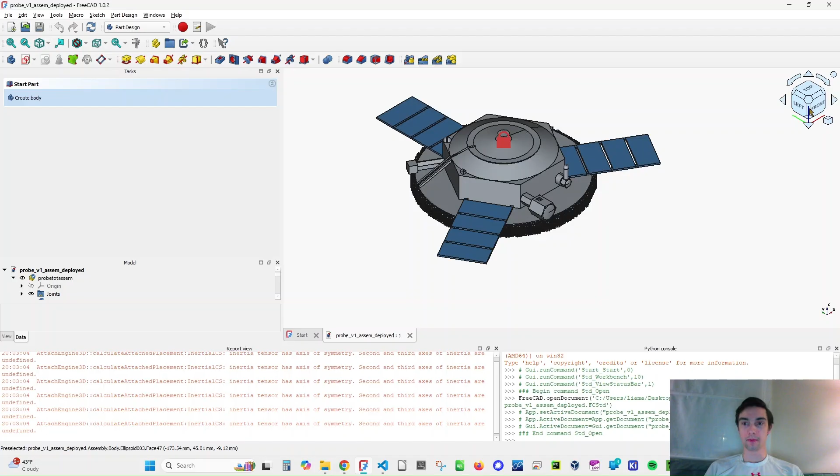So as promised, we're going to start looking at our CADs. I feel like the most important thing is the probe itself. So let's look at the probe in its deployed state. And so we have CAD here. Yes, this is how I'm going to orient the probe during this video.

Don't mind these. Don't worry about this.

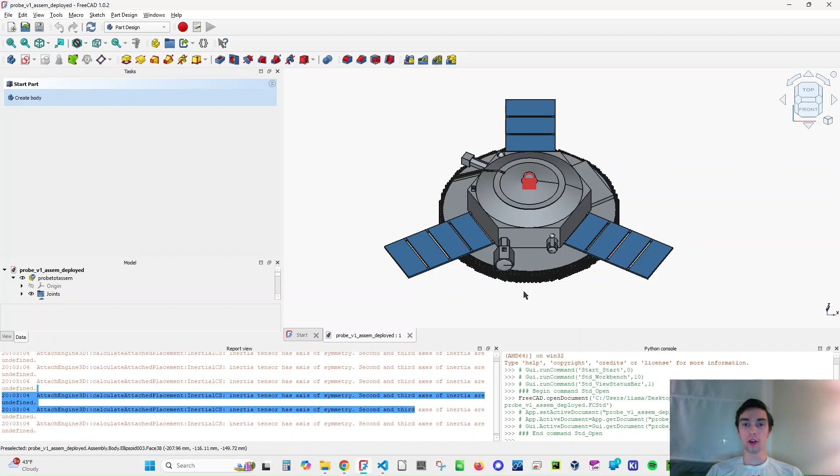So again, this is a pretty small probe. If we look down topside, this has a diameter of, I believe, 850 millimeters. So we're looking at about 1.3 meters in total diameter, including the extended panels.

So the actual probe body itself, can I zoom in? Hello?

One of the big issues with this model is, of course, I've got our beautiful crush zone. And one problem with our crush zone is there's so many hexagons that it has to draw a lot, is what I'm saying.

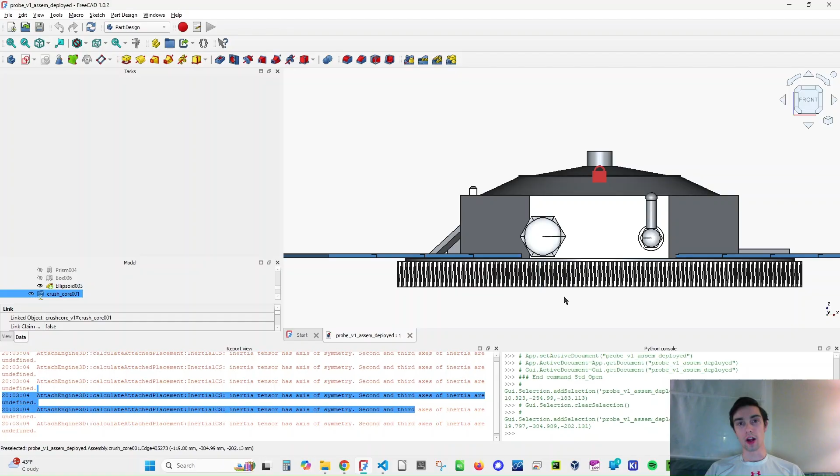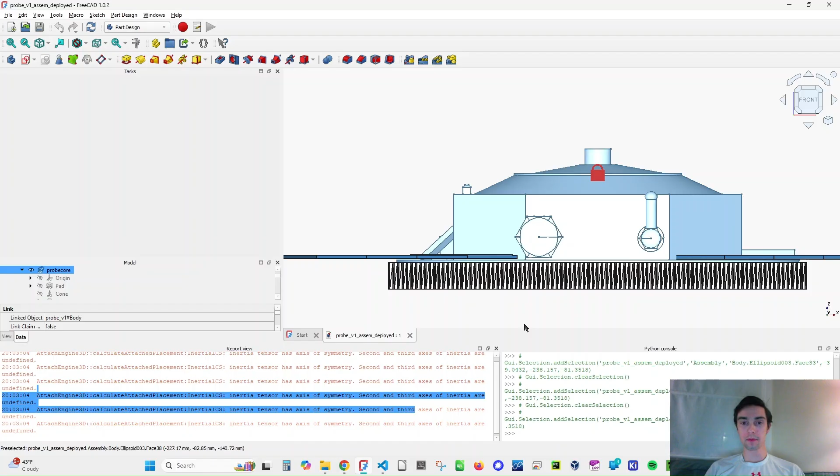So we've got this hexagon here, which is our primary bus. This is where the electronics is, the heater, and of course the battery, the MPPT, maximum power point tracking power converter system that we'll use. And it also holds the radio transmitters and receivers.

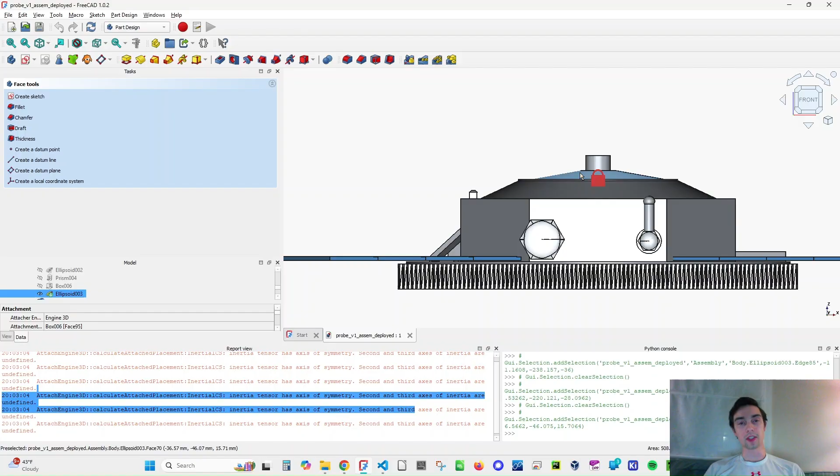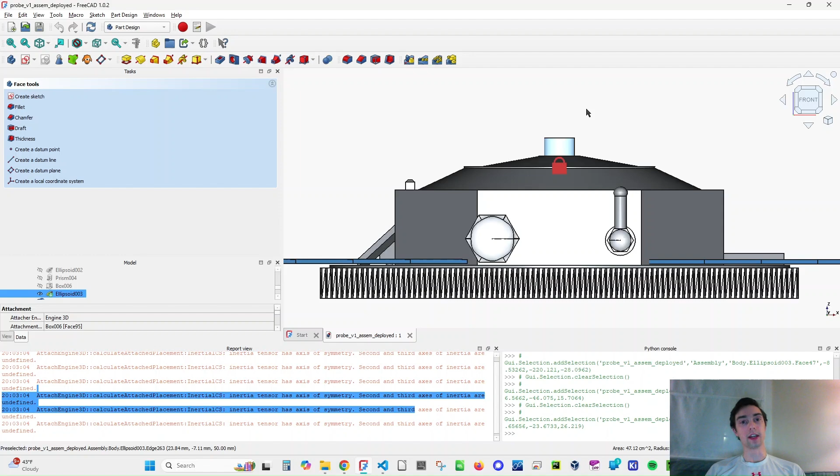We have dual transceivers on the probe, as mentioned before, and our antennas are actually in these top sections. This block here is also where there's a helical antenna, but it's actually primarily just a mechanical protectorant of the rest of the probe during launch of the probes and entry into Mars. So yeah, these are basically where our antennas are stored.

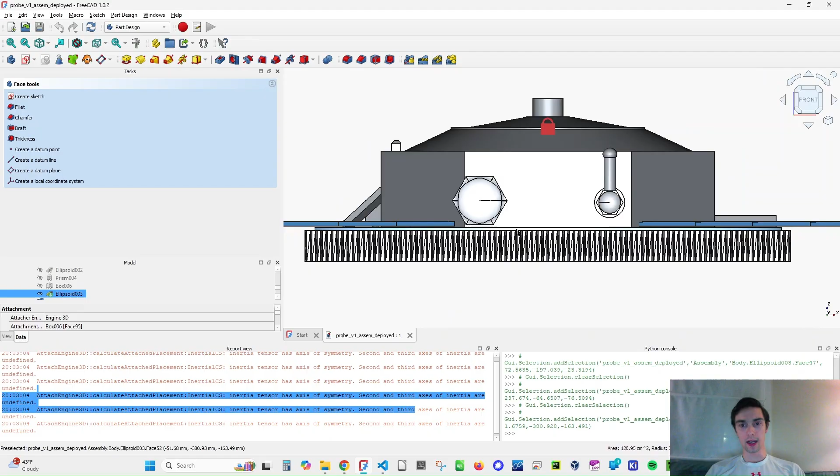This is our main bus that is insulated with our cork and then MLI insulation. And then we've got just a thin aluminum panel here. It is just 5 millimeters, and it is mainly to spread out the force impact from the crush zone, which is all here. I don't remember the exact specs, admittedly. That's in a past video, but as you can see here, it's pretty dang thin.

So I guess I can't see. Will it let me? No, it will not play. Nice. Cool. Okay. But that's not the point.

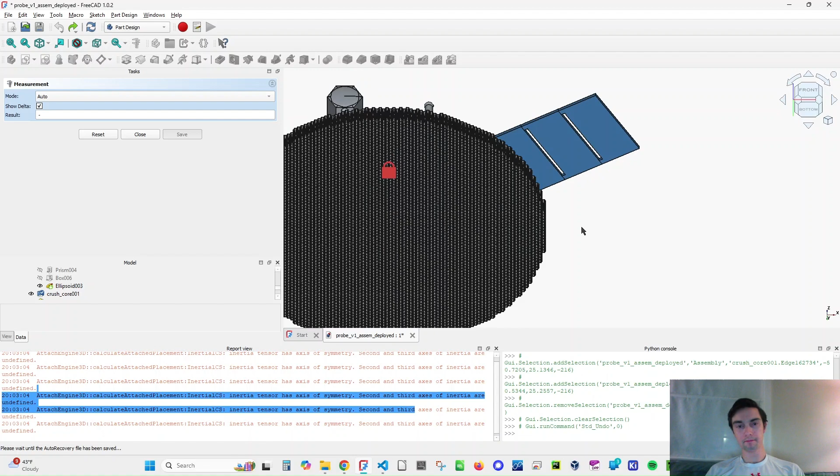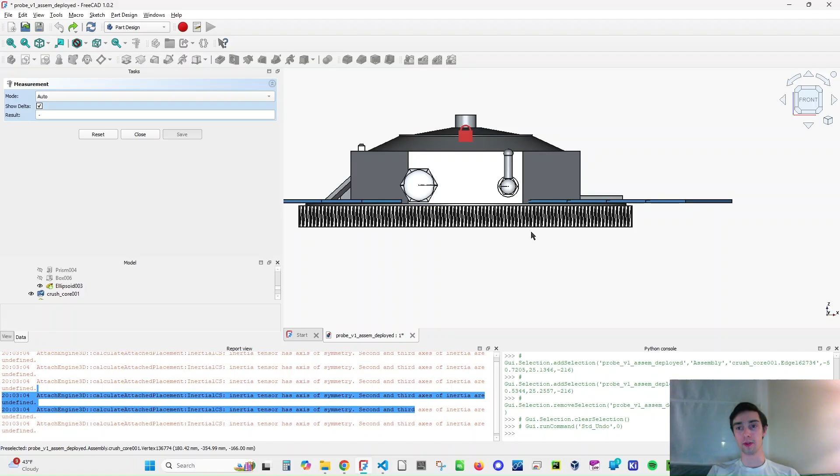So that's our crush zone. It will not be able to absorb all of the energy of the impact, but the probe itself is designed for 300G with full operation status. And that's with a safety factor of 1.2. And that's what our panels are expected to hit maximum before they are unable to deploy.

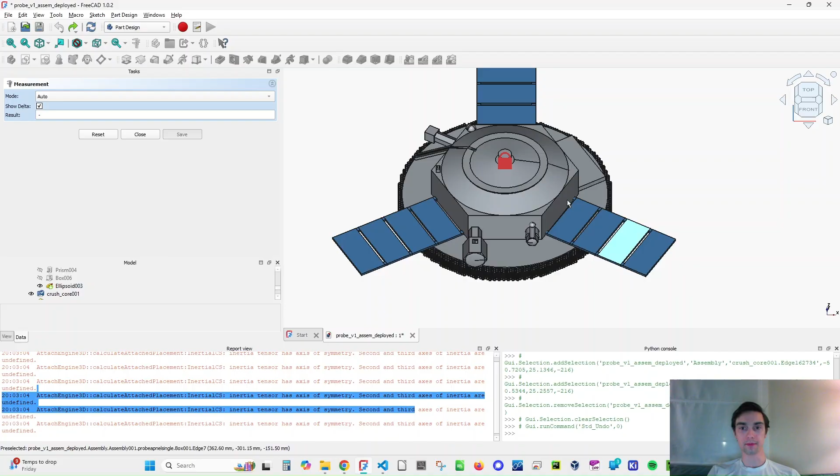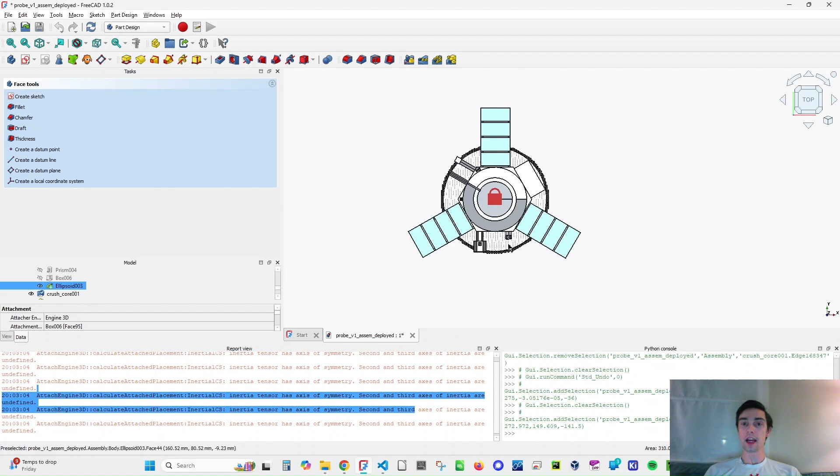And then they're folded up where this last panel here on each side will be facing out and up at a 45 degree angle. What's colored wrong in this model is, okay, I don't need to measure, this is actually an additional panel right here. Of course, it is blocked by the actual probe bus, but it is there, always deployed, and its one segment is a little bit larger than any one of the 3 deployable sections. Okay.

One notable thing about the probes, so I'm just getting my models here. So here's exactly the same. Technically, in this model I just made the crush zone a cylinder. And then this is our aeroshell where the probe is, and the probe is again stored upside down. We've got that little protruding nubbin, essentially, and that is stowed downwards.

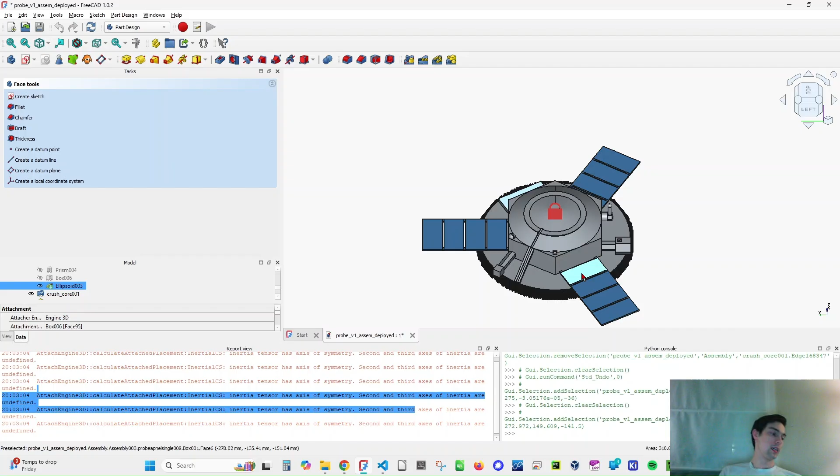But of course, we're downwards and we need it to be right side up. So how do we do that? The answer is due to the lack of forces during the parachute section of the probe. We essentially just have the track of the parachute. This nub is also where the parachute is attached to the probe, and it simply just goes in this little channel here. Pretty simple. And it reorients the probe like that.

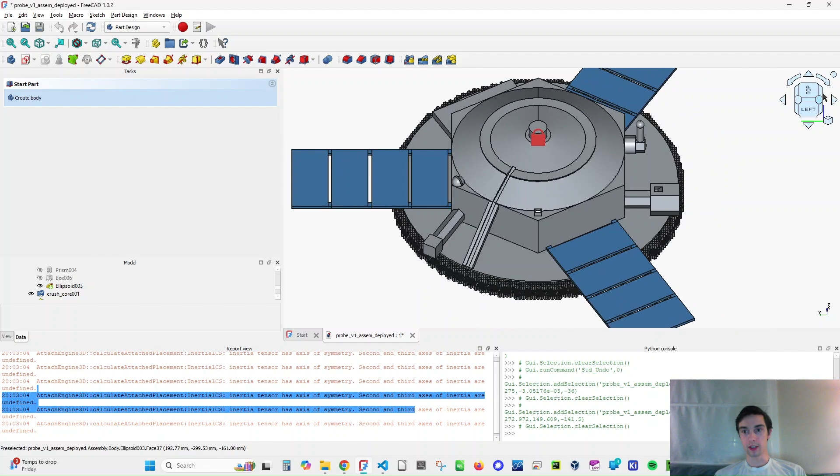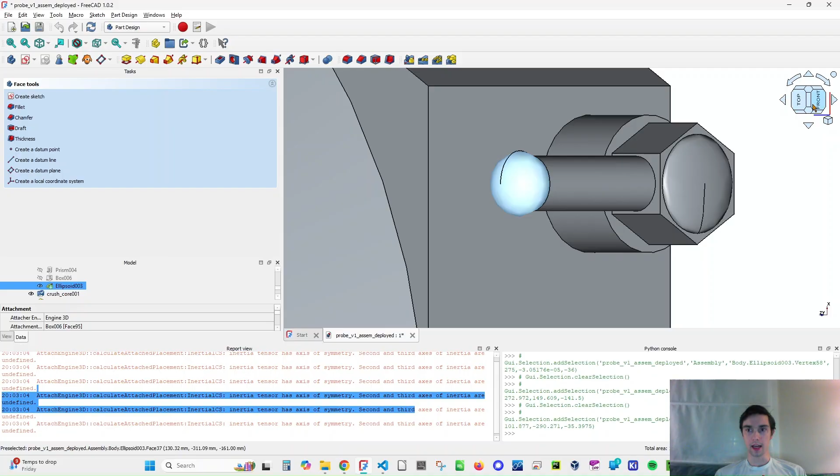Okay, so let's talk about some of these sensors that are on the probe. First we're going to talk about this one. This is our anemometer, and it also has an antenna in here for static discharge, so we'll be able to detect static buildup and lightning. And you might notice that if we take a side angle here, we are blocked by the probe. That's okay. We have another anemometer right here.

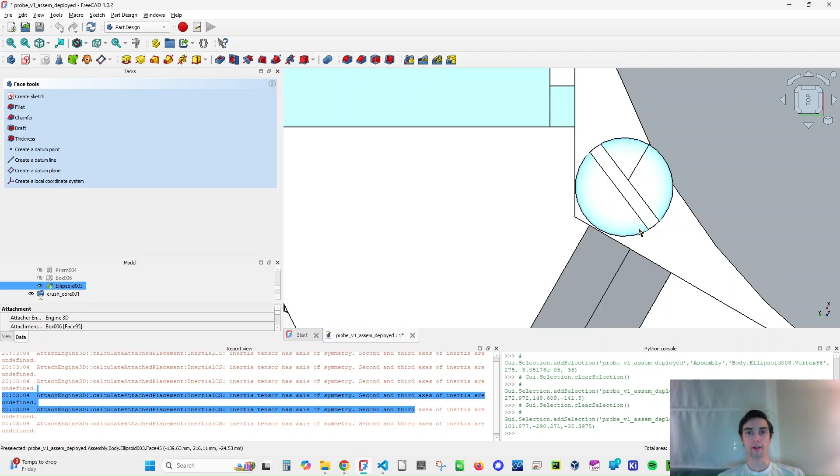This has a split cut in it to help. Because they're solid state anemometers, they just measure based on the difference in temperature across this entire surface area. This kind of works like a pitot tube where you have a stagnation zone. All of the exposed probes have a temperature sensor. And alongside these panels on the underside, we'll have temperature sensors, just to create a better band of knowing, so we can compare the wind to make it more precise. And they can also be used as rough anemometers.

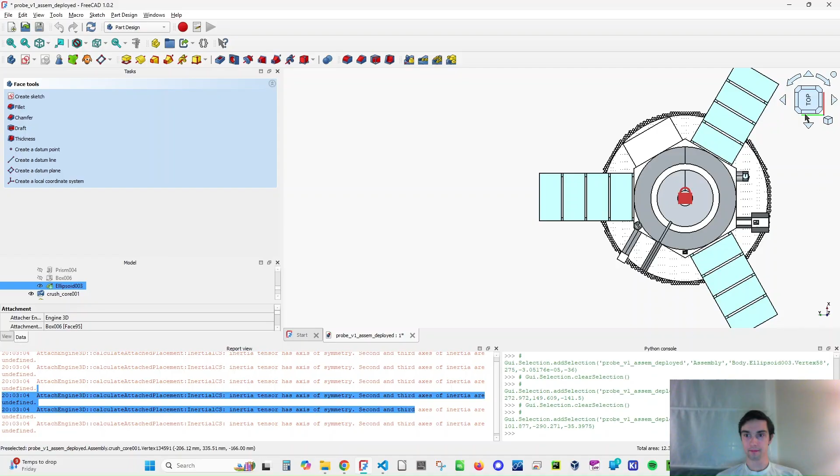And then our main cluster. I'm not using a mouse, so my apologies for the reorientation of the probe, just using my cursor.

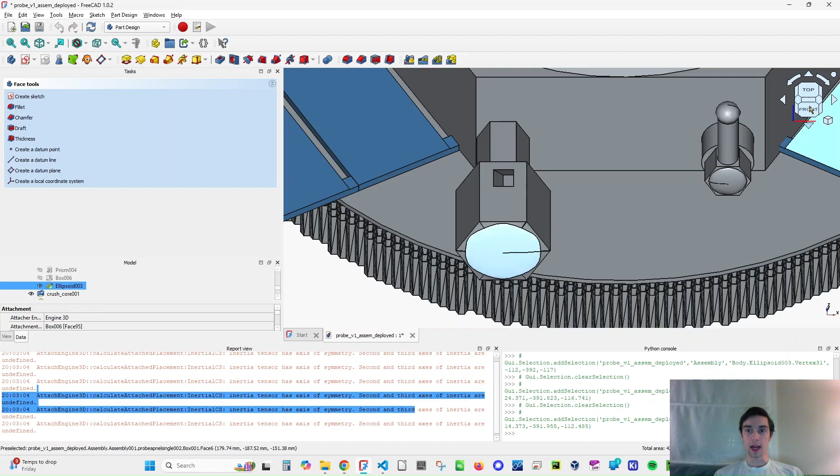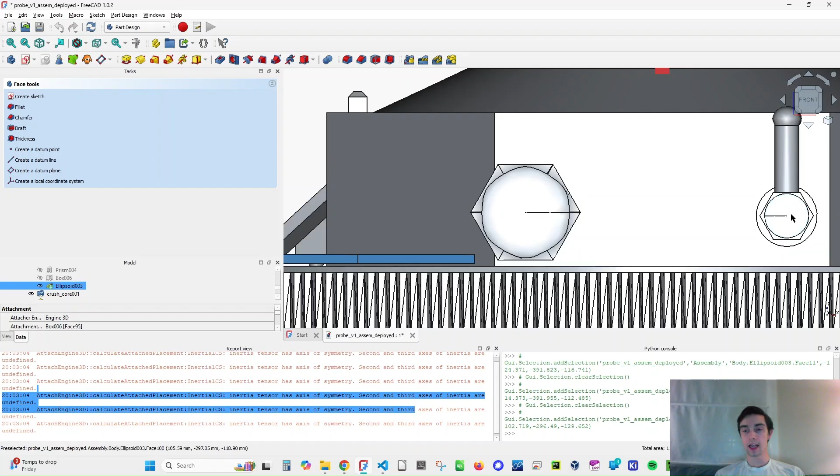So we've got a camera here, another camera here. What's important about these is pretty simple. This is our main optical stills camera, that is the side angle. So we have a downwards angle and a side, and that's for our visual. And then this is our thermal camera. It's an incredibly low resolution, and that's on purpose. And then here we've just got more temperature and barometric pressure sensors. Pretty simple.

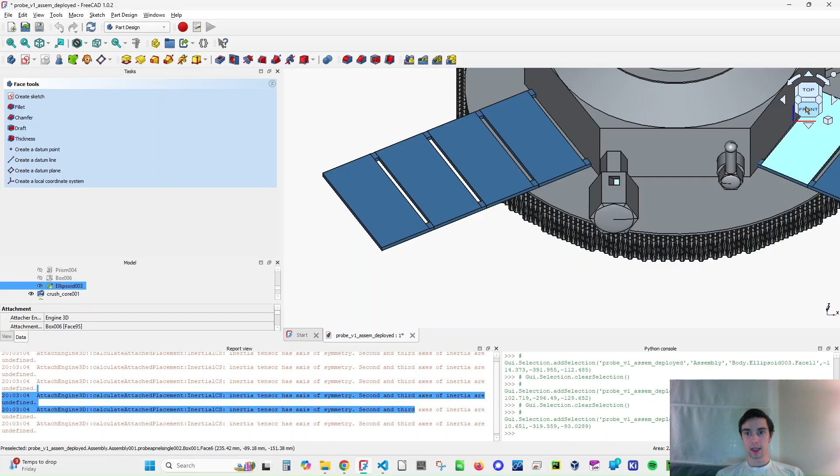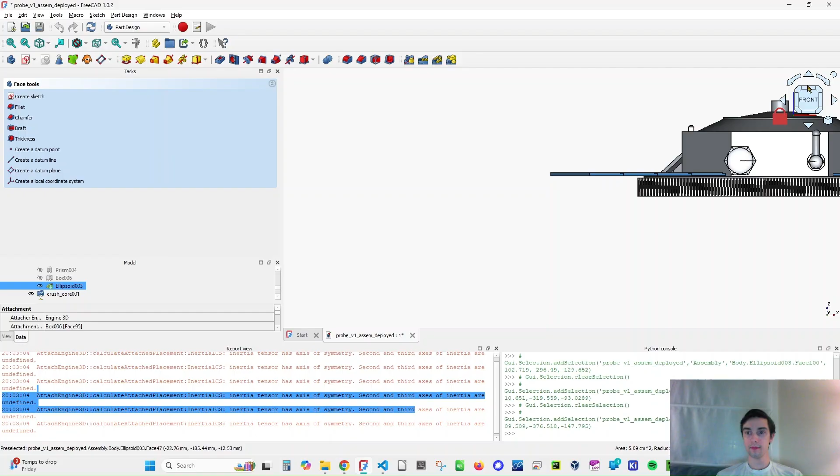Also, you might have seen that we have a little protrusion here. This is our downward facing radar. Note that even though it goes through the honeycomb, it's not actually affected by the honeycomb at all, so it doesn't matter. And that's to get better precision on our altitude. Okay.

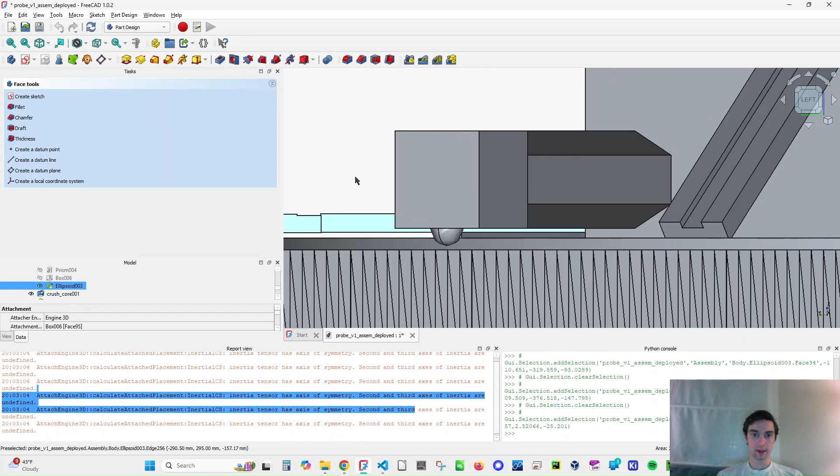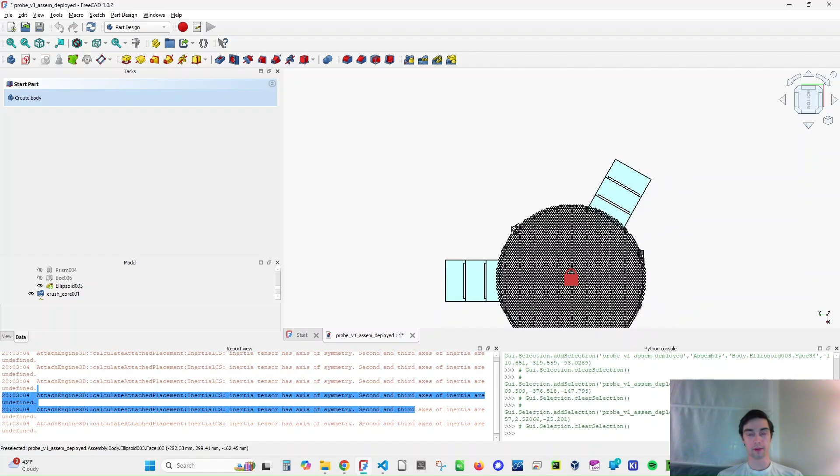So our next sensor is here, and this is again more of the same general meteorology sensors. And then here is our downward facing camera, and it has a telescope, a longer focal length, which is why the lens is so bulbous. That's just for straight down, because the probes will be transmitting on their way down during the EDL phase of this mission. Let's say that something goes poorly. Well, we still want very good high-res photos of the descent. So that's what they're for.

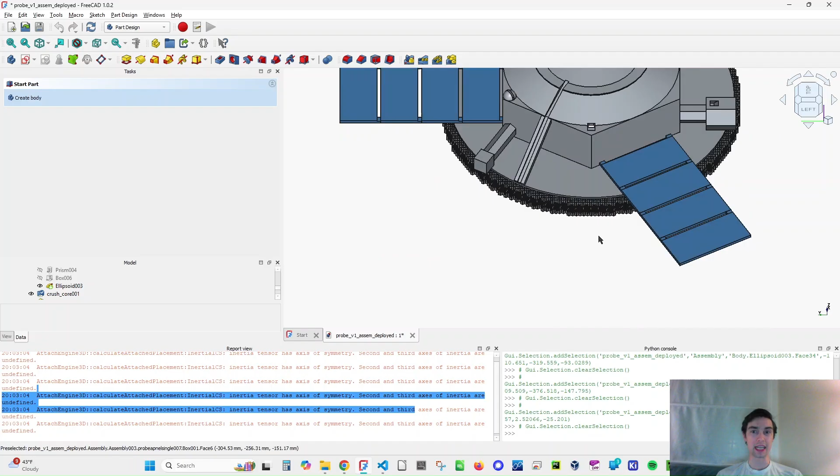So that's kind of the basics of the probe. There's a little bit more to it, but in terms of external features, that's really all that matters.